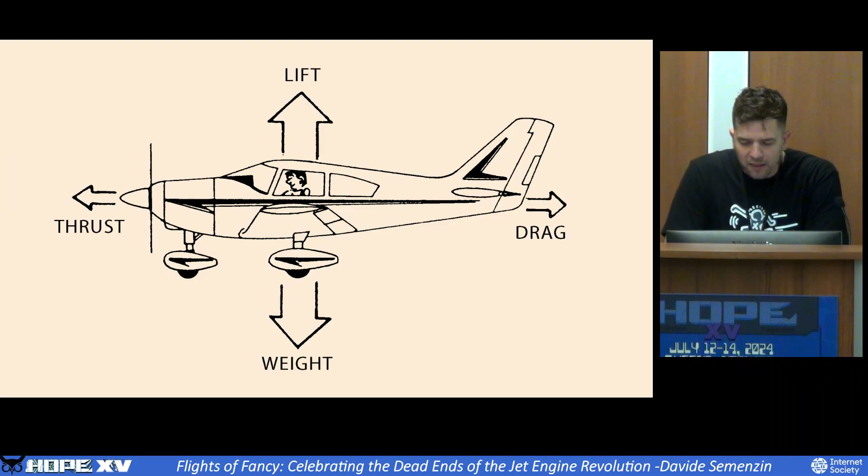If you're not familiar, these are simply lift generated by the wings opposed by the weight generated by the planet, and the thrust generated by the power plant that gets opposed by the thickness of the air. Or as the pilots in our midst will know, these are the real actual four forces of flight. Anyway, so here's the flyer. You've got the propellers back there that are pushing it forward, and the wings that are pulling it up. The whole structure is pulling it down, and the thickness of the air is pushing it back. So these forces are opposed pairwise.

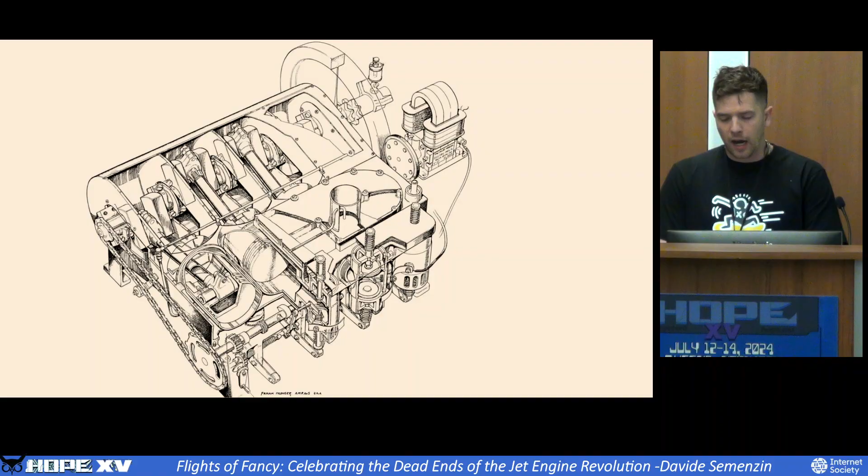So what's interesting about that is actually this guy right here. That's the engine back there, and that's a big propeller that's pushing the airplane, right? That's the power plant. That's how the first airplane was propelled. It was something that looked like this, and at this point in history, this is a very, very well understood entity, the reciprocating piston engine. And what this really did is it attached with a chain to the propellers, spun the propellers, moved the air forward and pushed the airplane forward.

Something I actually want to clear up here that's sometimes a misunderstanding is that technically all airfoils, all things that move in a fluid by thrusting it backwards, are technically jet engines, right? Technically, every airplane and every boat moves by propelling the fluid that they're in backwards and reacting to it. So what really makes a jet engine is not the fact that it's just exhausting air at high velocity.

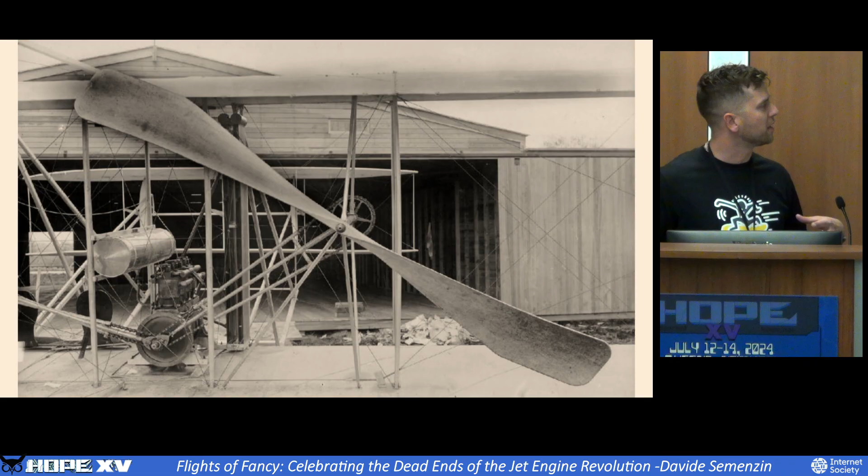What makes a jet engine is that it exploits a different set of phenomena. In a reciprocating piston-propeller combination, the engine generates rotating motion to spin the propeller, whereas in a pure reaction engine, combustion more directly generates the propelling force. The simplest such scheme could be a balloon or rocket engine, where gases expand in a confined space, get exhausted at the back, pressure drops, velocity increases, and you react against it.

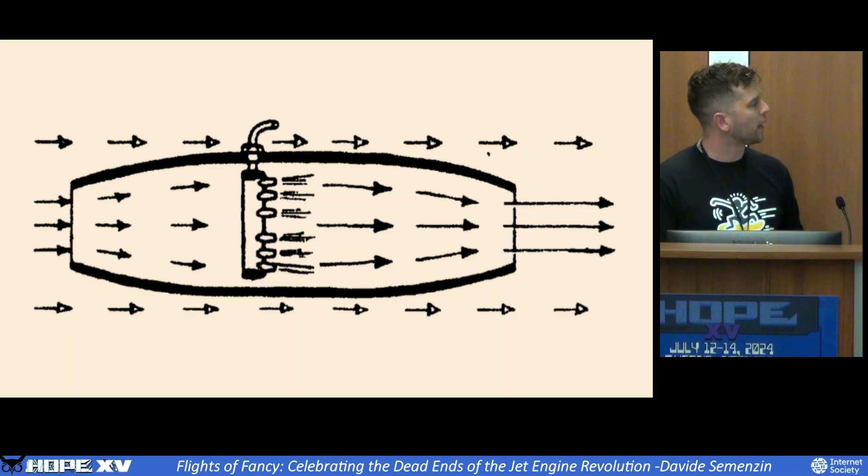There are largely two types of such jet engines. This is basically a rocket engine, and it's non-air breathing. Whereas the air-breathing version takes air from the surrounding environment instead of carrying it itself, ignites it, uses combustion to expand the gases, increase the velocity, and react against whatever it's attached to.

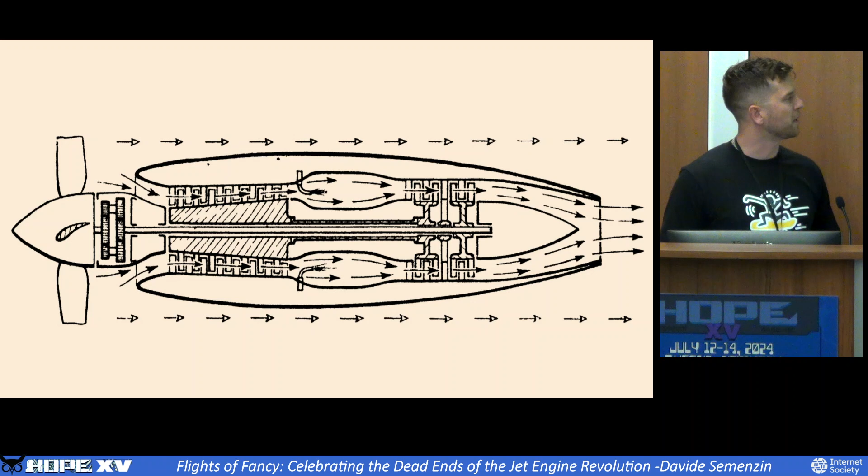There is a third type, the turboprop, which we're going to talk about later. This is kind of a mix of the two, where you use part of the energy generated by the reaction engine to spin a shaft. But really, when I talk about jet engines, this is what I'm talking about. You've all seen this. The basic idea of a modern engine is you have a compressor that takes the air, squeezes it, combusts it, and uses the high velocity exhaust to spin the turbine, which spins the compressor. The remaining energy is exhausted through a converging-diverging nozzle, creating a high velocity flow that you react against.

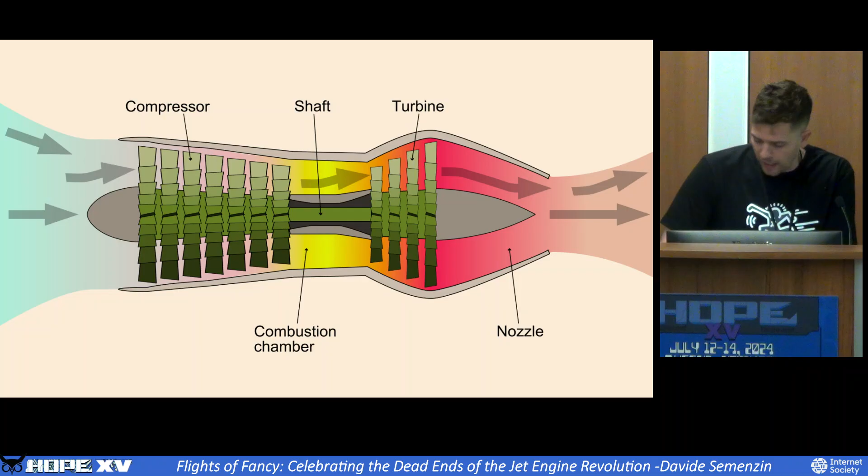If this does not seem like an obvious idea to you, it shouldn't, because it isn't, and it took quite a bit to get here. We see these things around all the time and we're used to them, so to us this seems obvious because we have the burden of knowledge.

So I think the question for us here is, how did this come about? If you go and look at the Wikipedia page for the history of the jet engine, and try to find out what this really looked like when it came about - what were things like in the early 1900s, where you had these very strange contraptions the Wrights were creating - how did we go from there to the modern airliners we saw? You're going to get a story that goes something like this, and it doesn't matter if it's Wikipedia or some documentary - I watched all of them.

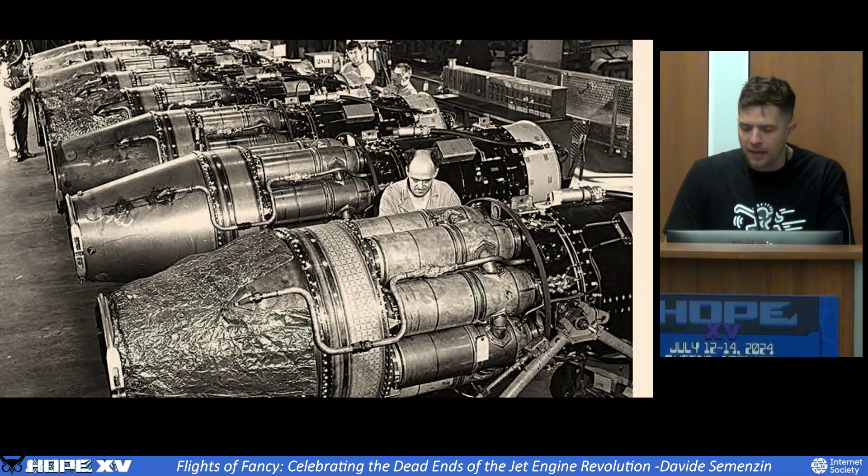If you heard the story before, you might be like me, and find that this invites more questions than it really answers. It's not all there. There have to have been so many other things happening before we actually landed where we are today. Like, what was wrong with piston engines? Why couldn't it make the plane faster? Where did the idea of a reaction engine come about? Who had it? Why did it take 30, 40, 50 years for it to mature? Why did it mature when it did? I want to try and answer some of these questions today.

I want to try and do the impossible. We have the burden of knowledge - we know the systems work, we know they're wildly successful, and we know the modern airplane uses a jet to propel itself. But let's pretend that we don't. Let's go back to the early 1900s and try to invent the jet engine. So our task is this.

We have an airplane, and we just want to go higher and faster. How do we do it? Well, we have a couple of options.

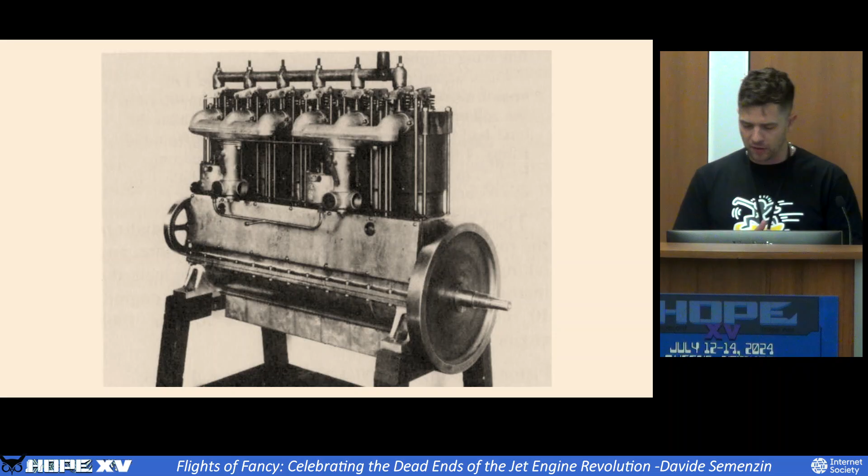So we can try and improve on this. I'm probably stating the obvious here, so sorry pilots, but that engine works like this: good old suck, squeeze, bang, blow, or for the more educated amongst us, intake, compression, power stroke, and exhaust.

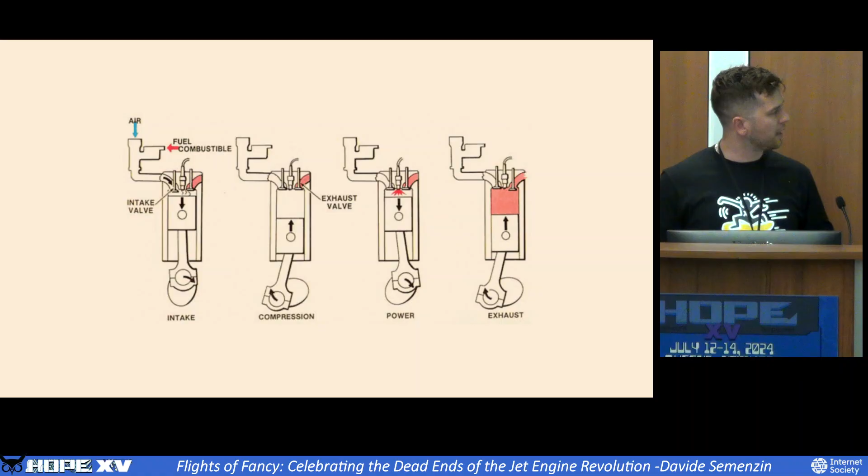The idea is you take some air, you squeeze it, you add some fuel to it, and combust it, increasing the pressure which pushes down the piston. You do this in a coordinated fashion across cylinders, each at a different point in its cycle, organized so they're all pushing down on the crankshaft. If all of this goes well, it creates a rotating motion—you attach a propeller to it, and you're good to go.

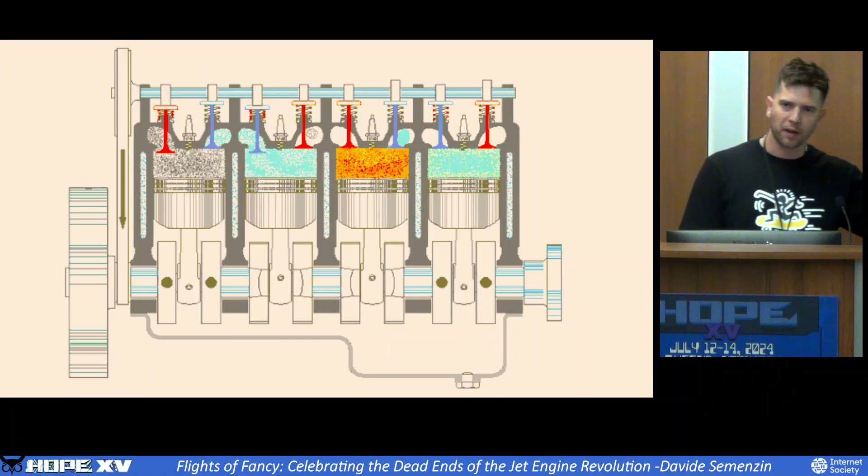So how can we make this better? Well, obviously we can add more cylinders—a lot more cylinders. Each one contributes to the downstroke a little more, and we get more power. More power means we go faster, and that's great.

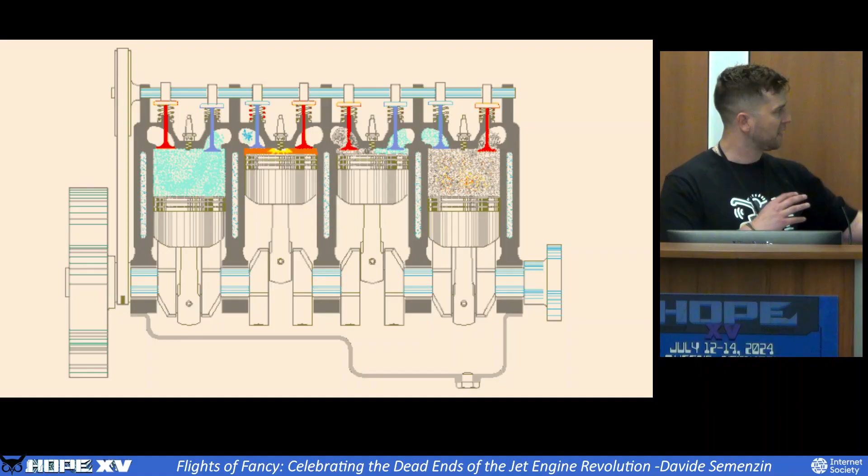One problem is that this engine works by a combination of a lot of little explosions, and each explosion is responsible for turning the crankshaft by a certain amount. The more cylinders you add, the smaller that amount is, and the more complicated the system becomes. More importantly, there's only 360 degrees in the turn, so you have an upper limit to how many cylinders you can have.

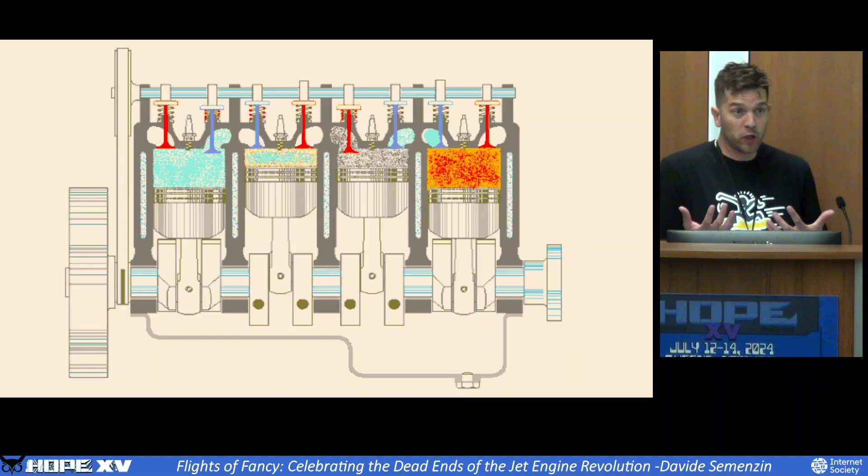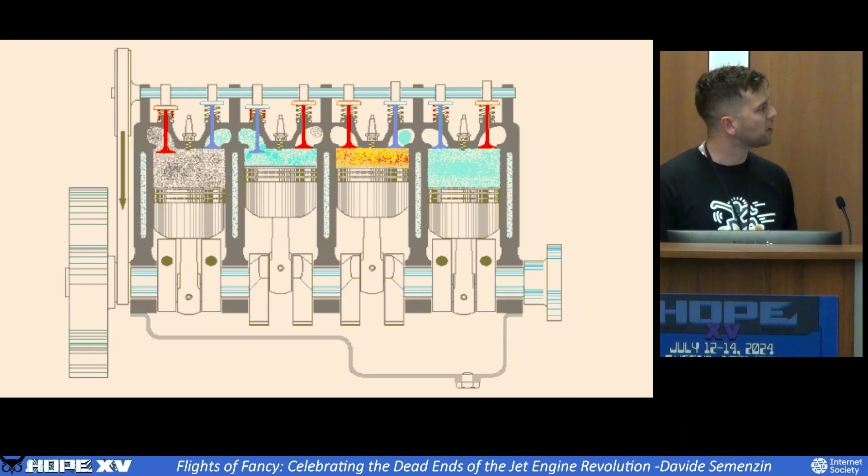We could make the cylinders bigger—for each cylinder that's bigger, you just get more oomph. But you can only do that to an extent before it gets harder to cool. You can make the cylinders longer, but that increases inertial loads on the rotating parts and ultimately reduces your power density. So you can make these things bigger, but only up to a point.

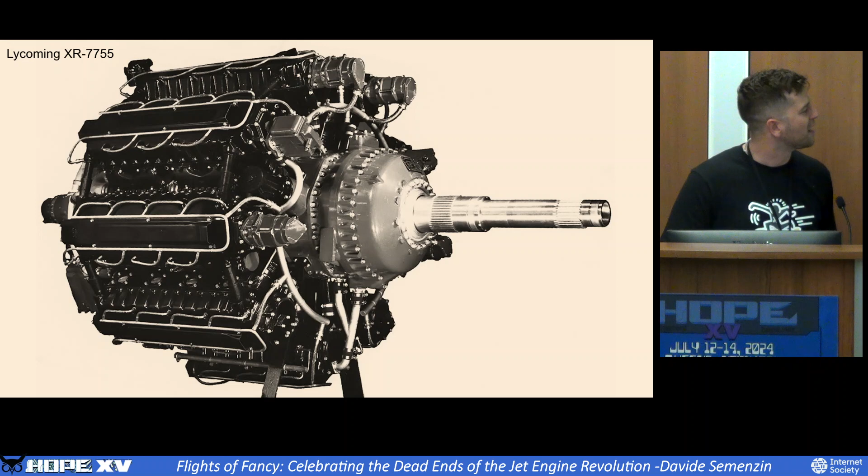And then there's another problem. Well, see, this is what happens when you have like 36 cylinders—this is the largest engine in terms of cylinder count ever made.

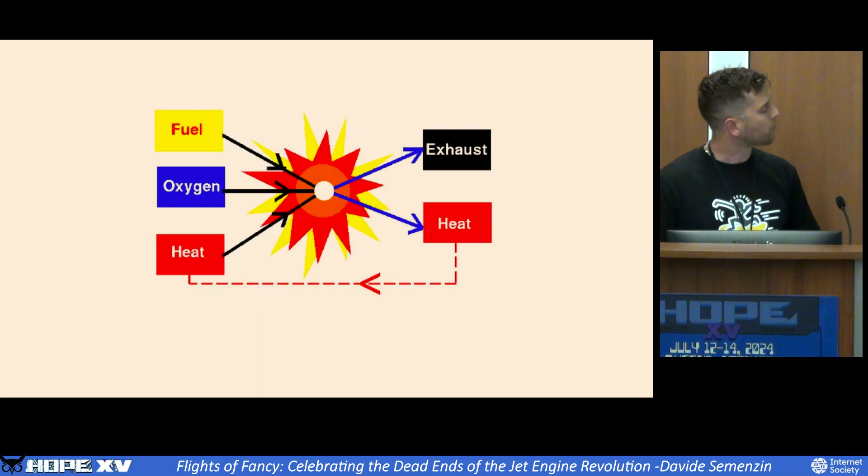The other problem is that airplanes have this pesky tendency to go up in the air. And what happens when you go up in the air? The density drops—there's less air to go around. So if your main mechanism to generate energy is combustion, you have less stuff to use to combust. This actually was a huge problem in the early 1900s, and this is the first thing we really need to solve.

It was solved by the use of a compressor—this is called the supercharger scheme. It simply uses some of the power from the crankshaft, which would otherwise go directly to the propeller, to compress the air before it enters the cylinders. This makes the combustion more efficient and lets the plane fly higher. Isn't that nice? There's only a problem with this.

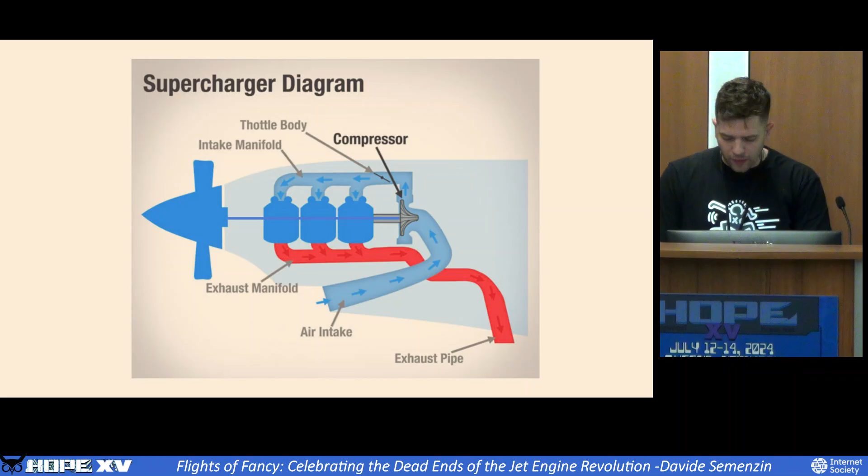Well, there's a couple of problems with this. The main problem is that it obviously takes energy off of the main combustion, off of the main rotating shaft. So this guy right here—he'll come back later—he actually had a pretty good idea.

Around 1920, he was tasked to solve a problem, and he invented this. This is called a turbocharger, and this is maybe the first really significant step towards the jet engine. The idea here is that you take the exhaust gas from your engine and stick it through a duct, and then use that hot and fast gas coming out of the cylinders, like a bat out of hell, to spin the turbine that then compresses the air.

This is better because it doesn't absorb any energy from the shaft, and in fact, it's just using the...

These engines are extremely inefficient, right? They convert about 20 to 30% of the power into motion, and the remaining into noise and heat. So you capture some of that with the system. That's great, it lets us go really high up, and keeps our fuel consumption the same. So our specific power has just gone up.

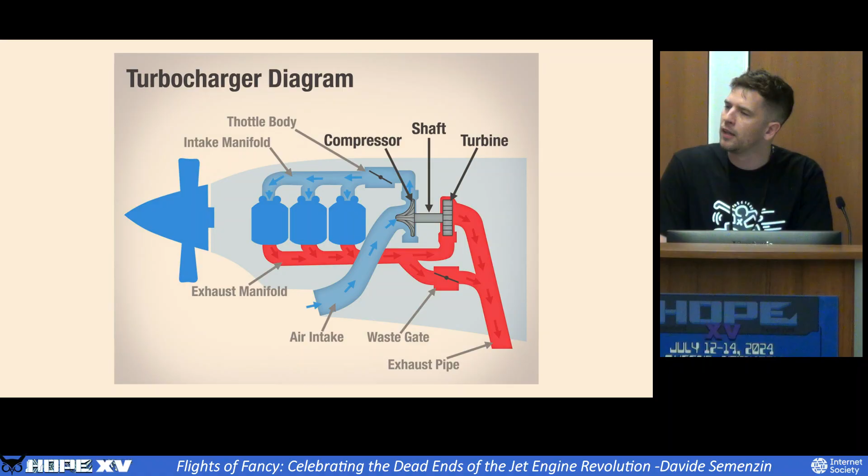One thing people figured out when doing this was that the amount of exhaust coming out of there was actually really significant. And when it was exhausting from that pipe, it still had energy. So the next thing we can ask ourselves is, how can we use that? What schemes exist to make use of that excess energy? We're already paying for it, we've already burnt it, so how can we put it to some use?

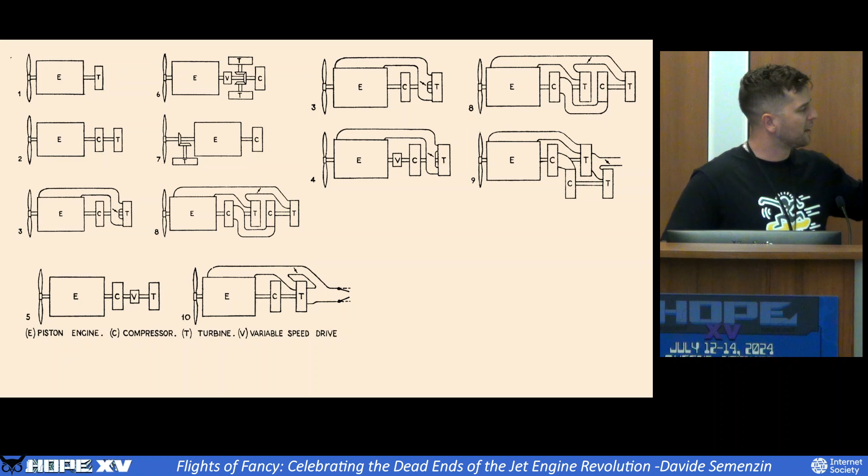There are a lot of these schemes, and not all of them were implemented, but the idea behind this, called a turbo compounding engine, is to use some of that energy to actually drive, in the first iterations, the crankshaft. This is the first engine in which this was used, the Rolls-Royce Crecy. It had a little turbine, actually like a Whittle-type turbine, which we'll talk about later. Even though it never really flew, it used the entirety of the exhaust to drive this turbine that then added that power to the crankshaft, again increasing the specific power.

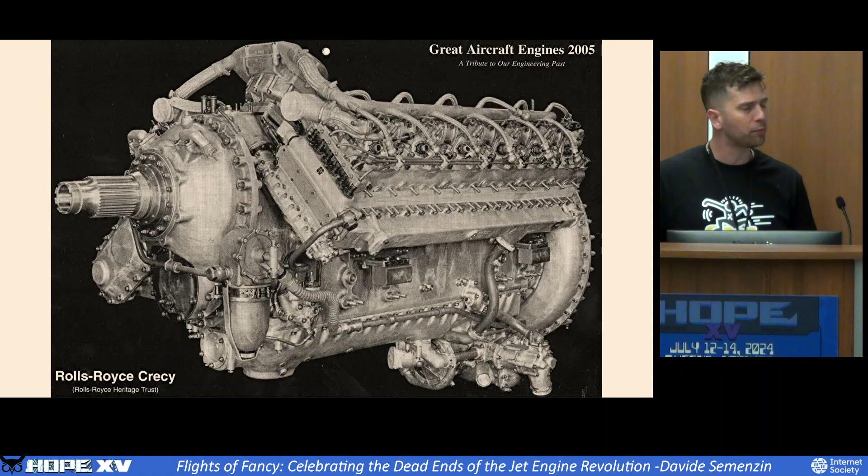What's interesting about this idea is that even though it was sort of a dead end, it was interesting when we realized you can use that exhaust not just to drive the compression, but to actually drive additional power to the crankshaft, since there was enough power in it. Another engine that did this, worth mentioning because it used a different type of compressor, an axial type compressor, was the Allison V1710. This also never flew.

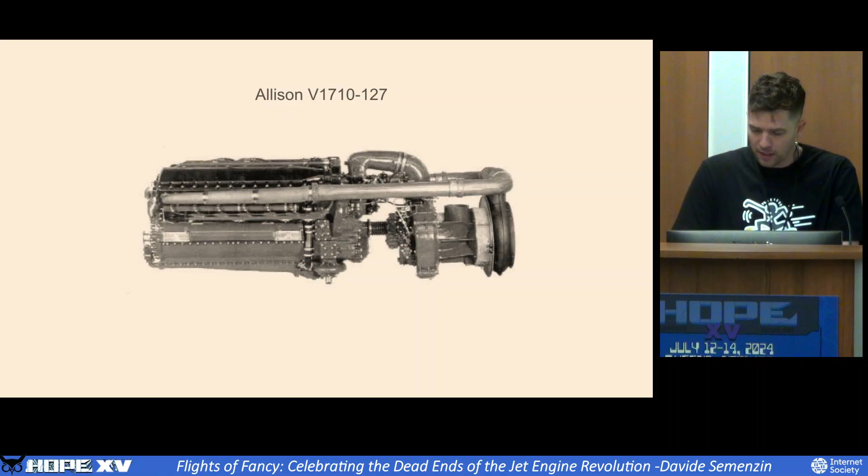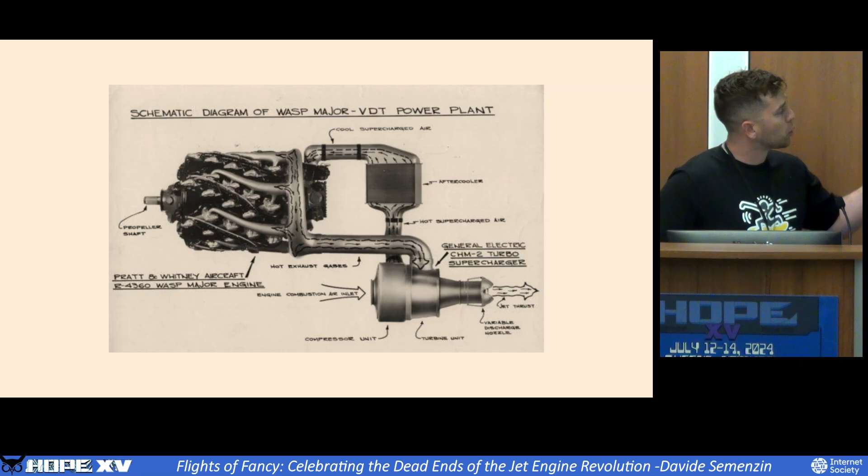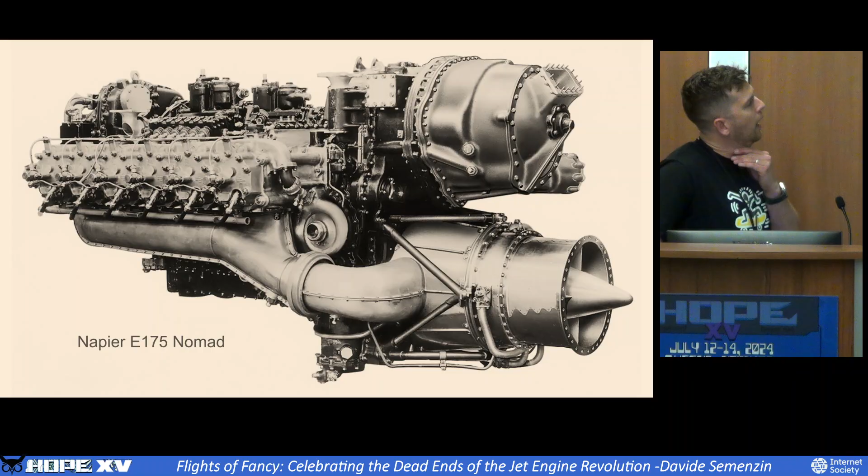The next thing after this was realizing that the flow coming out of that turbine still has energy. So instead of driving that flow towards the crankshaft, what if we use that flow just to accelerate the airplane forward? It's a little bit of a reaction engine in there. The WASP had such a scheme, but really the goat for this was the Napier E175 Nomad, and this guy had it all.

There's a lot going on here. This is one of my favorite contraptions ever invented, a glorious dead end. It had a gigantic opposing piston engine, and the way this worked is the air would come in here, it would get compressed...

The compressor was spun by a turbine, we'll talk about that. Then the compressed air, which gets hot, was cooled so it was more dense, and then that would go into another compressor that would send it to the engine to burn and create the exhaust gases. Here's a new invention: there was a combustion chamber downstream of this engine to further accelerate those gases so they would go to the turbine, spin it, and keep this whole thing going. After this, this turbine wasn't just doing all the compressing, it was also spinning one of the two propellers in the front.

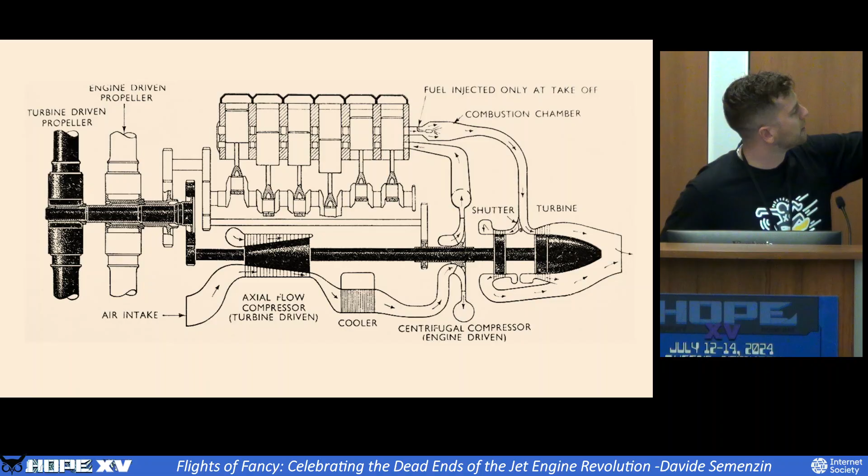So you squint here and you're like, have I seen this before? With some of the complication here with the double prop, it looks even more pure, right? You have an air intake, you have a lot of what looks like a jet engine, but it's just going through this gigantic, super complicated contraption. And this was never developed further—one of the greatest dead ends.

The reason it was a dead end is that people started realizing the amount of thrust you'd get through that little turbine was starting to compare favorably with the amount of power you were getting from the piston engine. So if you go this direction, we have some of the building blocks, but it looks like this is not going to do it—we're not going to get really far by keeping a piston engine in the loop.

So let's think about something else. Is there something that we can do that is not like evolving the piston engine, like with the crankshaft?

Well, if we roll back to the early 1900s, this is actually a pretty interesting thing. This guy, Lorin, he was a French soldier. He actually had a bunch of really good ideas.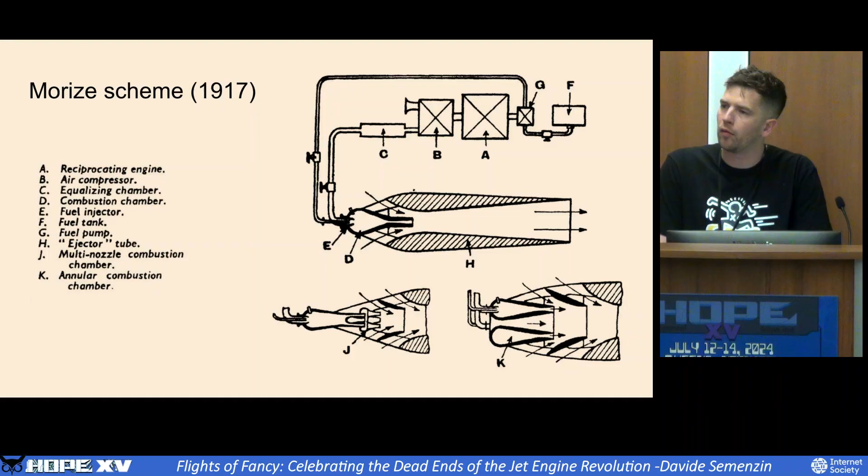It wasn't great. So another scheme that came up in the early 1900s was this. It still used A as a motor, and B as a compressor. It basically creates a steady flow of compressed air that goes into a combustion chamber marked D. The compressed air and fuel mix in there, gets ignited, and then goes through what's essentially a venturi that sucks in the air, multiplying the amount of air going through it, increasing the reaction.

There were a couple of iterations of this with different architectures for the igniters, but it was the same idea. One problem with this is that it used this converging, diverging kind of architecture that is not great.

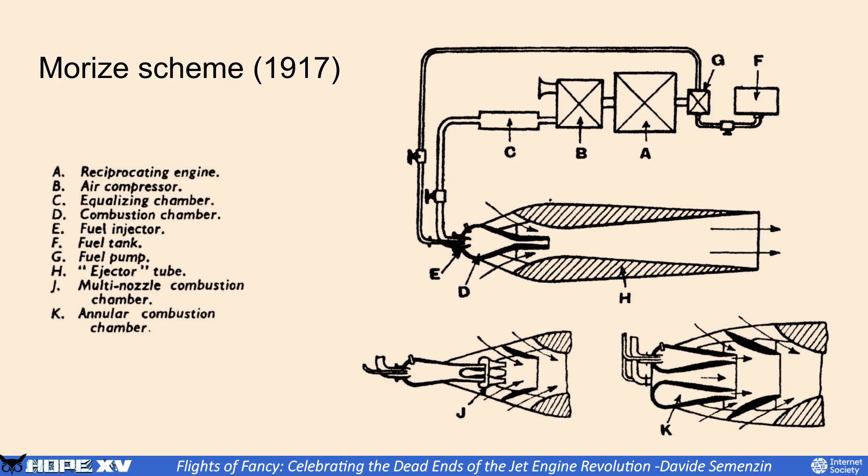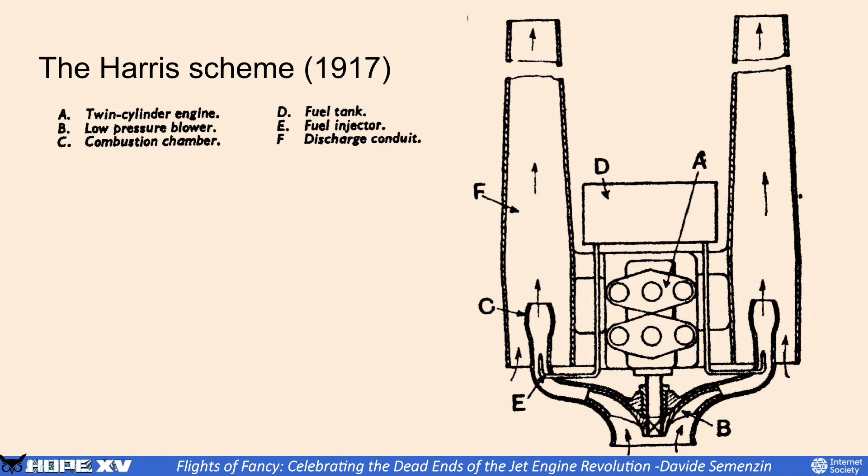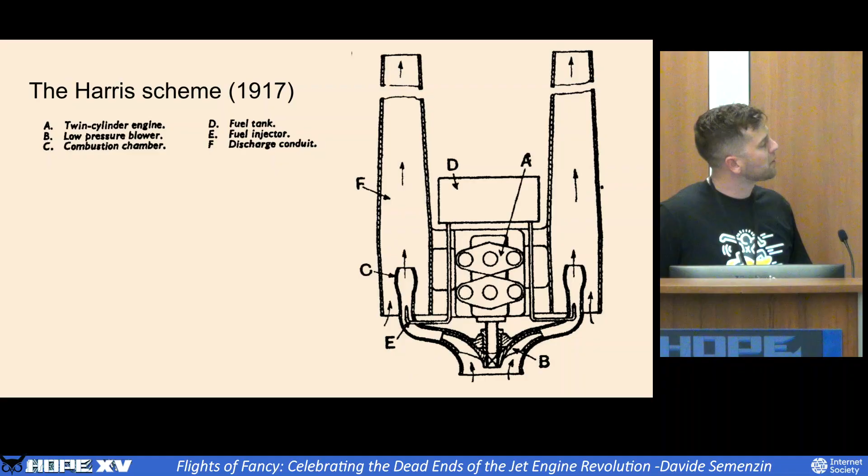So the next iteration did the opposite, using a diverging converging long tube to take in the gases. The idea here is at A, you have a motor spinning the compressor. At B, that's taking in the air in the injector E. At C, the air gets ignited, creates an area of low pressure, and this low pressure flow accelerates along the tube and sucks in more air. The tube is really long so that by the time the gas gets out, it's at the same temperature as the outside air, so it doesn't allow for backflow.

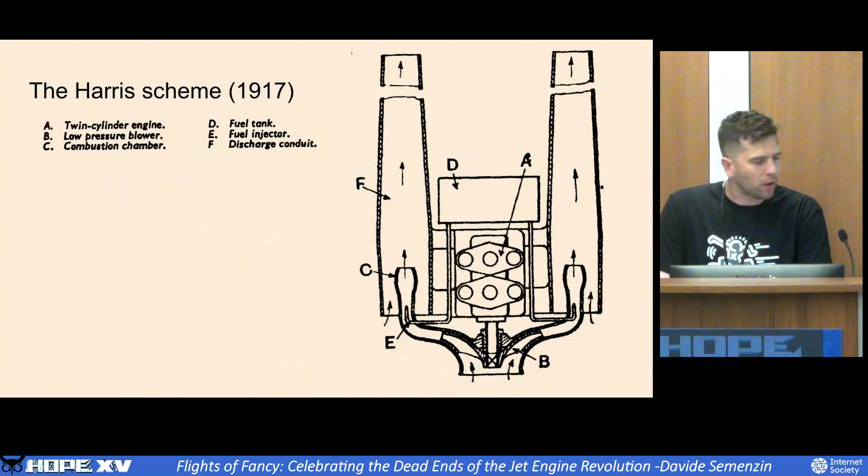This never worked. But the general idea here was to try and accelerate gases by exploiting a combination of combustion and low pressure, right?

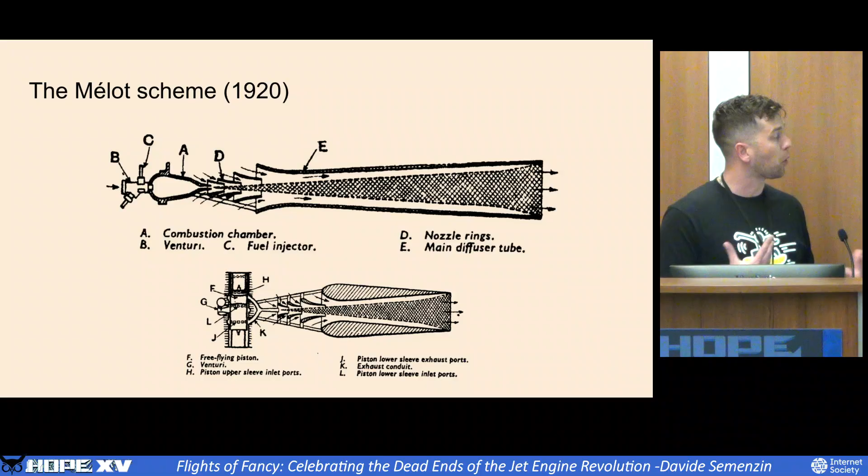This is another similar scheme, and this was actually tested in Langley in 1927. There were attempts to recreate these engines and implement them, and they never really delivered the kind of specific power that could have been used for aircraft propulsion.

So here's a different idea, different but similar, but we're starting to go somewhere. Instead of using an engine that is separate, why don't we put the engine inside the engine, inside our prime mover? So you have a rotating engine here that spins a compressor, and then in line, the airflow gets ignited and gets ejected.

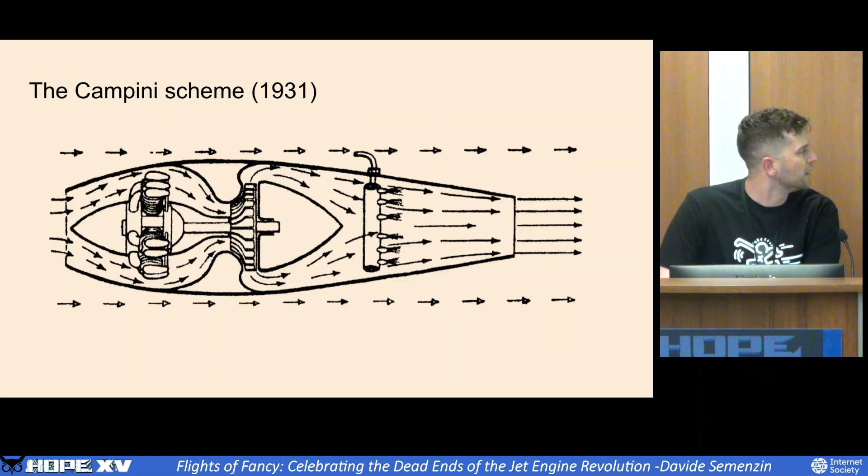This is starting to look a lot more like a jet engine. It's basically a jet engine where the compressor stage is powered by a piston engine. And this has a name. It's called the motor jet. The first motor jet was this Italian contraption called the Campini Caproni CC2.

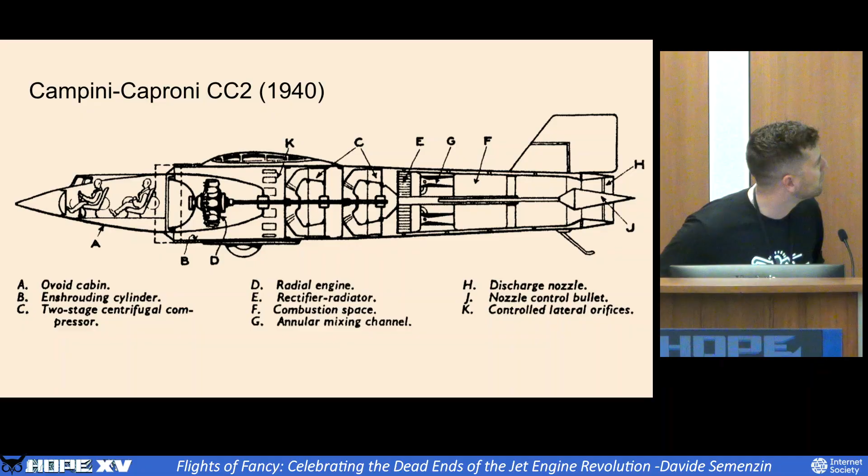It was incredibly inefficient and in its own way a dead end, but a glorious one at that, because it had two of the three components there, right? It had the compressor, it had the ignition... did it have the turbine? No, it didn't have the turbine, but the main compression happened through the piston engine.

So this wasn't the only one that existed. The Russians also had this idea. This plane sometimes gets depicted without the propeller. Depending on whether you want to use that engine to drive only the compressor that then creates the jet you eject at the back, or if you also want to use an air screw.

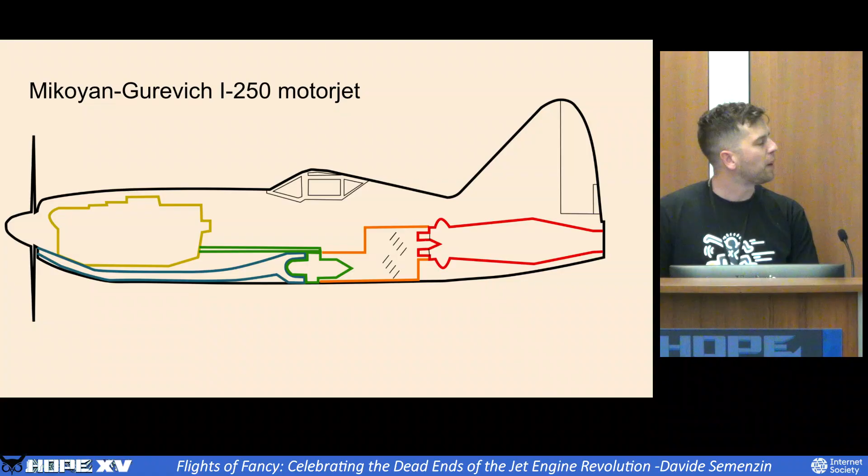Okay, so this is a dead end. This is not going anywhere. This was tried, and the specific power of this was not good. So let's go back to this. Here's another idea.

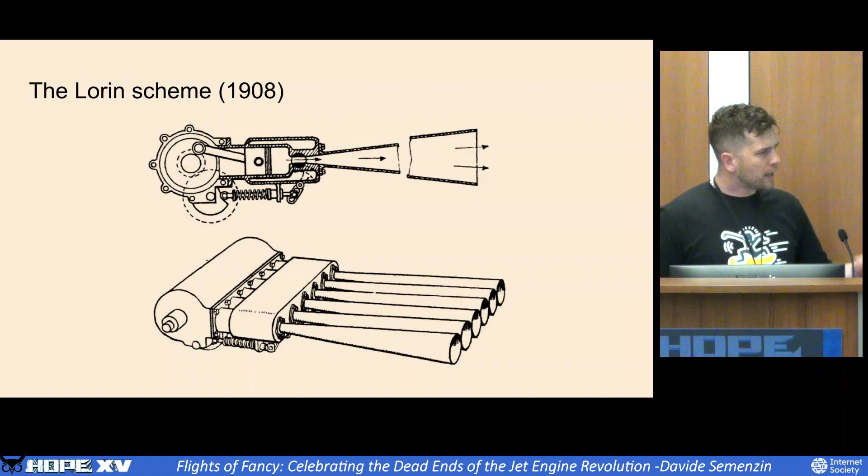Why don't, instead of trying to improve or use the piston engine, why don't we try and imitate it? We just take this idea of little explosions, right? That's called a pulse jet.

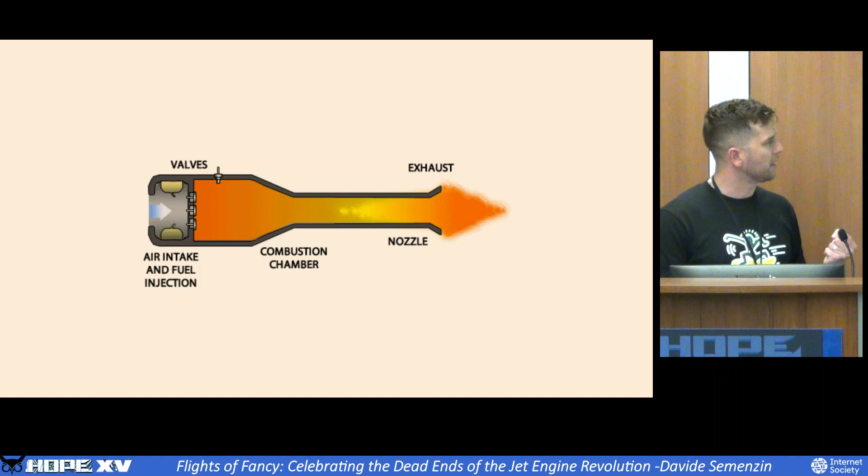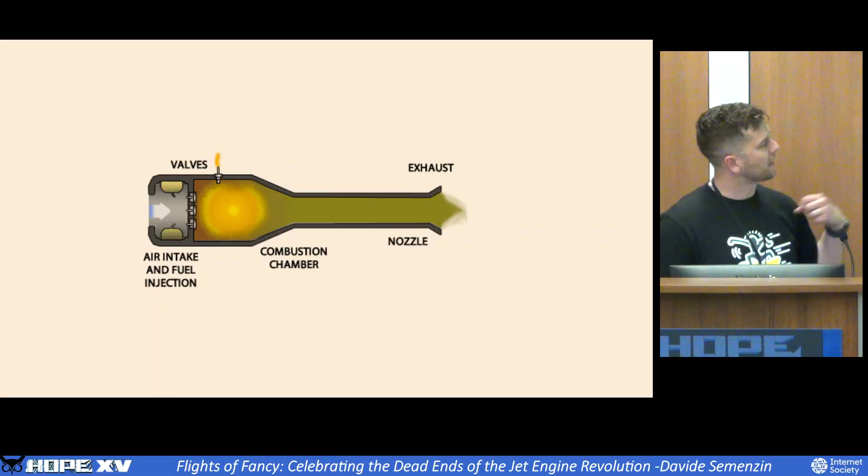The idea is this is a very simple type of engine where air comes in and you have some kind of flange that creates a sealed area. You then ignite it, let the gases exhaust through the back. That creates a vacuum that opens the intake, and the cycle begins again, right?

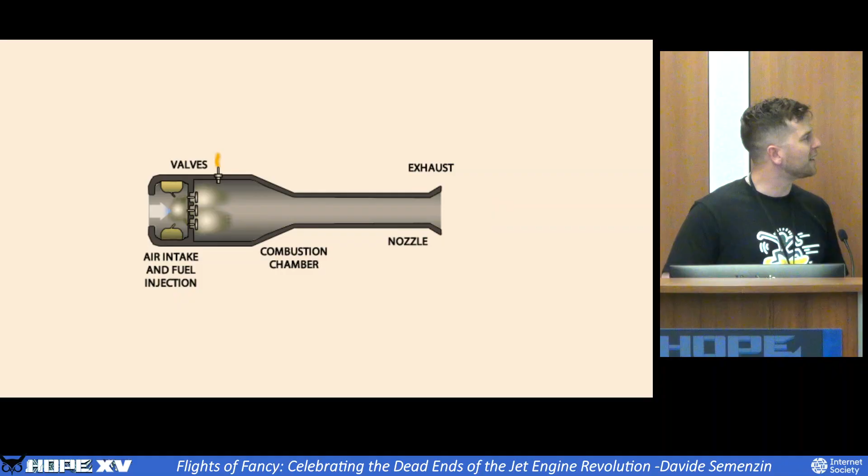However, no real pulse jet airplane ever came to production, because this was also extremely inefficient. And so we come to this guy.

So we're done, no jet engine for us. This guy said it's impossible, so we should all go home. This is an important lesson to bear in mind - we're going to circle back to that later.

Somebody didn't agree with that - Frank Whittle had a few things to say. But before we get there, let's just think about what we did. We tried to improve the piston engine by making more engine, making it bigger and faster. Didn't really go anywhere - it almost converted to a jet.

We tried to imitate it. We tried all of those weird schemes. None of that worked - they were very inefficient. So let's try a whole new thing, right?

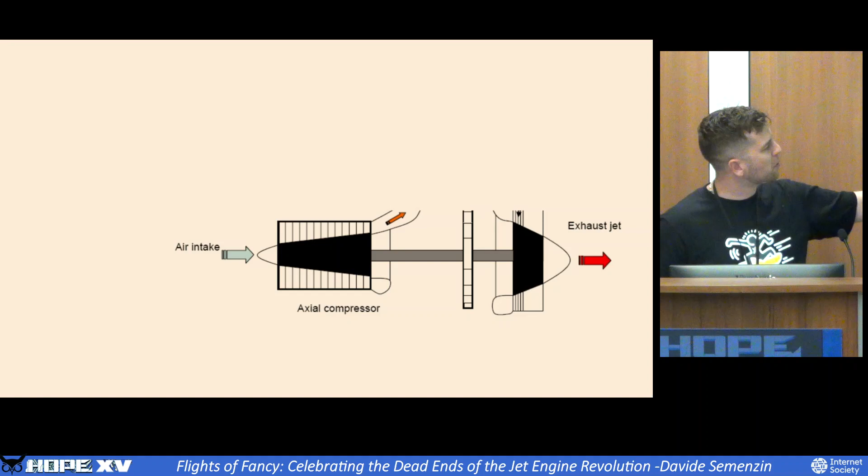Let's go back to this guy and focus on - remember it looked like this. Let's focus on the bottom half. Remember we were saying this thing really looks like a jet? It's just going through this whole big clunky thing. Let's try and get rid of that.

It's starting to look a lot like this. And there are three big ideas that we need here: suck and squeeze, bang, and then blow.

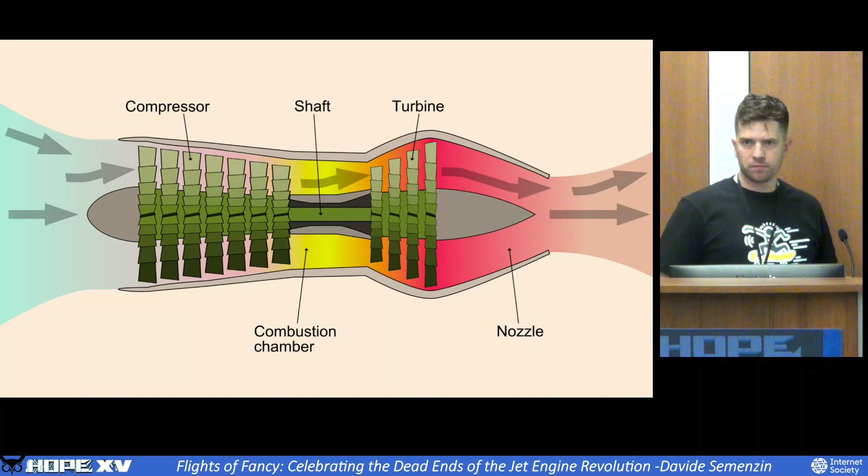The compressor is something that, by the early 1920s, was very well understood. Combustion was also decently understood, even though, for example, pulse jets never came to fruition because of combustion instability. The turbine, however, that's a more interesting story.

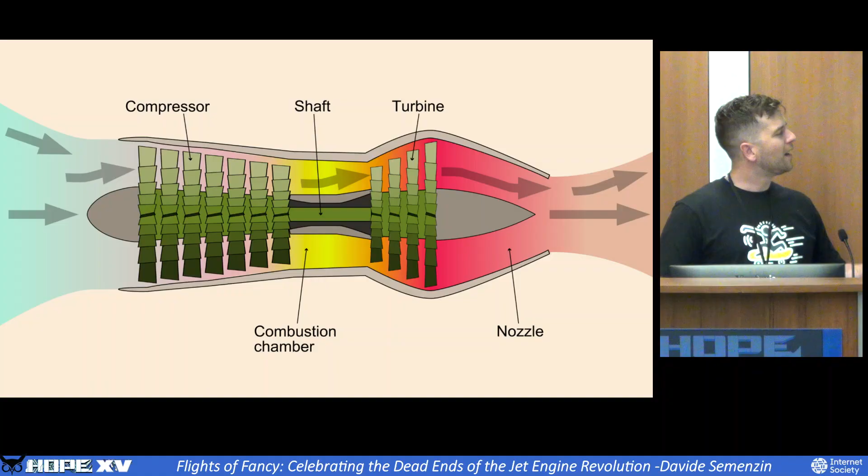Rateau, right here, we talked about him earlier when he invented the supercharger, the turbo supercharger. He also did a lot of work not only in the realm of compressors, but also in the realm of turbines. So if you know anything about turbines, you certainly know what this is, right?

But by the turn of the century, really the main way to generate power was the steam turbine. This was also a pretty well understood system, and it achieved pretty significant degrees of efficiency.

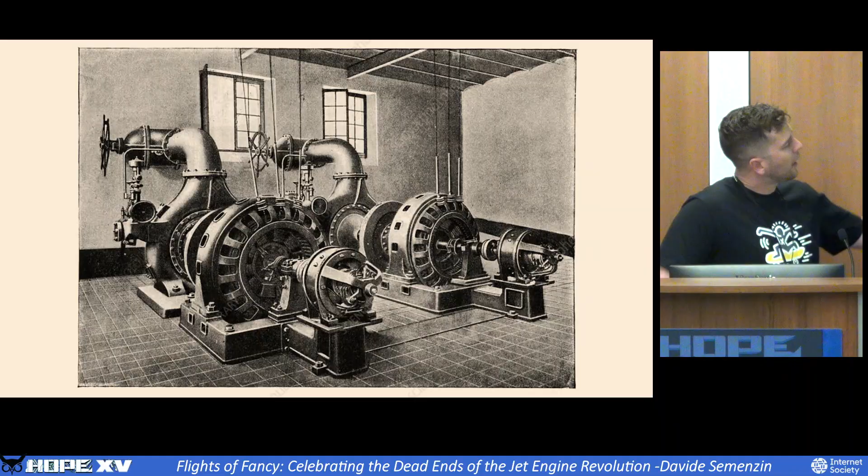However, this was kind of a new thing - this is like after you power your turbine with steam, what can you power it with? The big idea is you power it with gas, you power it with combustion, right?

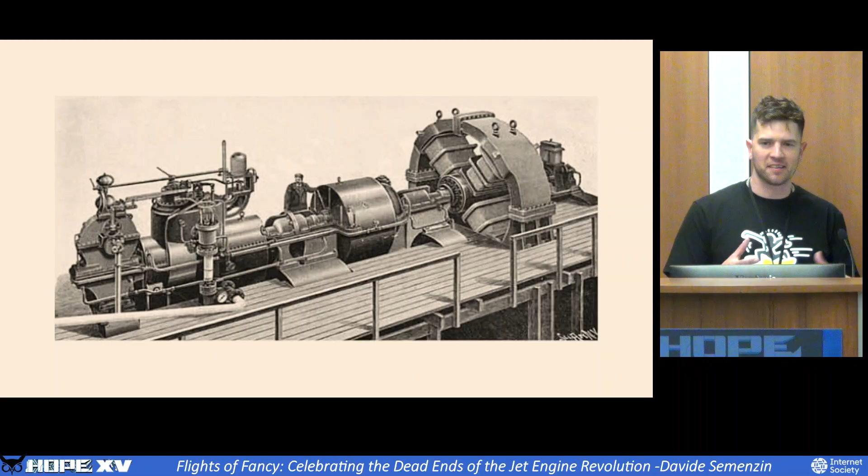It's kind of like a jet engine, but you don't use the jet to move stuff forward - you use that to spin a generator to generate electricity. The first one to ever come online actually came online in 1906, and it was built by this guy.

The problem is this was a huge thing - you definitely cannot put this on a plane. It's pretty heavy, and it barely generated enough electricity, enough power, to sustain itself.

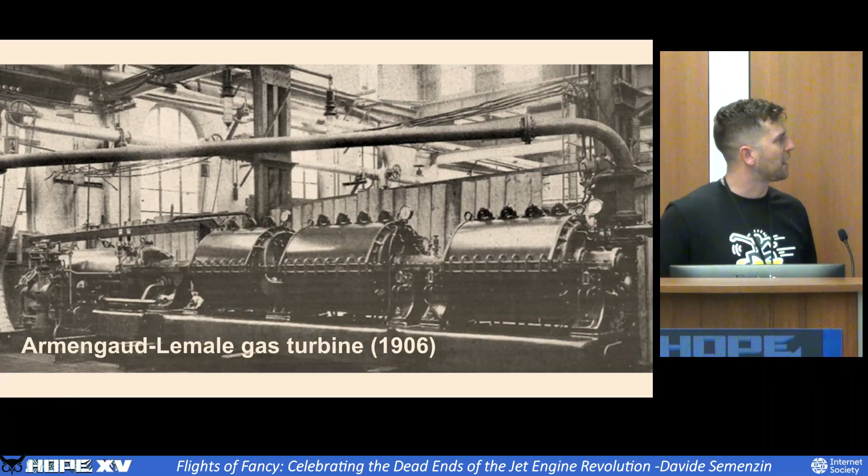And why is this relevant to the history of the jet engine? Well, it's relevant because somebody in 1921, Guillaume Maxime, had the idea of compressing air with a compressor and then using a turbine to extract that power. But this was never built because the materials weren't available.

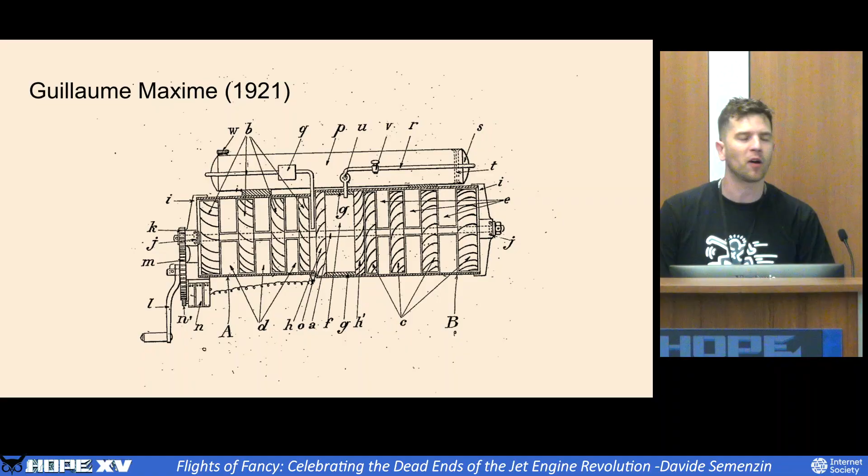But more importantly, successive attempts to build it never worked, and they led to that report that said this is impossible. The reason is that all of those turbines were flying stalled.

And the problem is we didn't have an aerodynamic model of the turbine until the mid to late 1920s, by this guy, Arnold Griffith, who wrote an aerodynamic theory of turbine design. This is the seminal, pivotal point that allowed Frank Whittle to invent the jet engine. And, okay, I should caveat that.

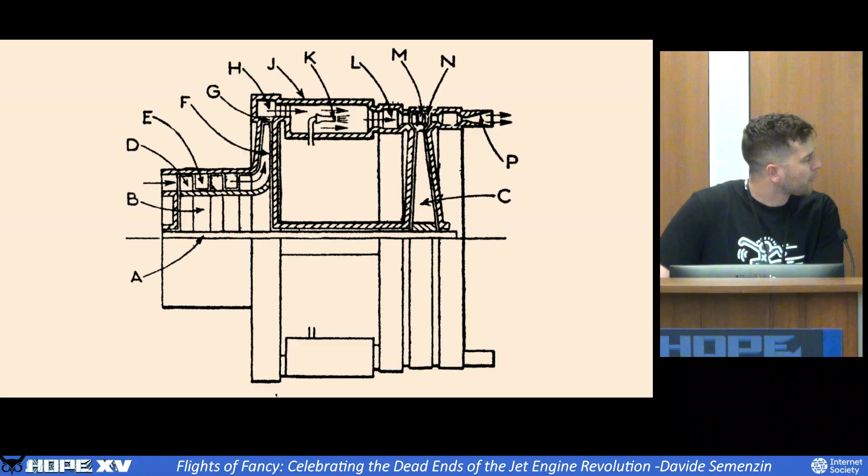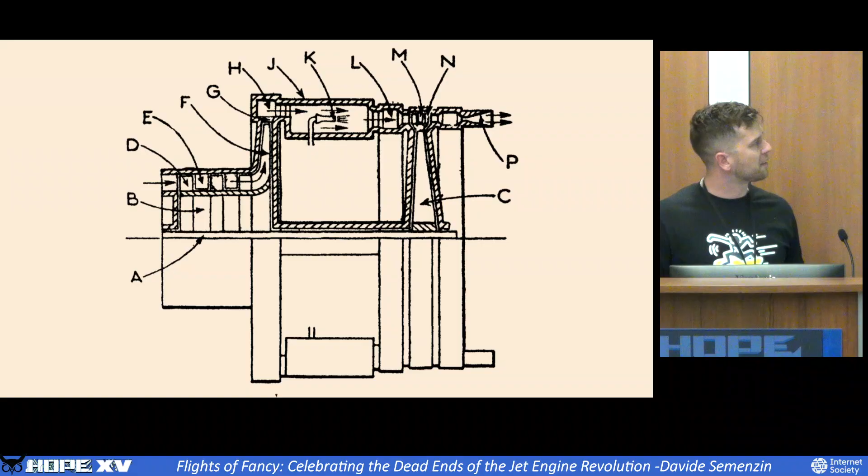So this is Frank Whittle. He is the guy who we usually, especially on this side of World War II, credit for inventing the jet engine. The first design, this was actually never built, looked like this, but his first jet engine wasn't something that could readily be put on the plane.

The second one looked more acceptable and compact. It worked by sucking in the air from the sides here. This was a double impeller design, a centrifugal double impeller, sending that compressed air into the combustion cans and then exhausting it through the back.

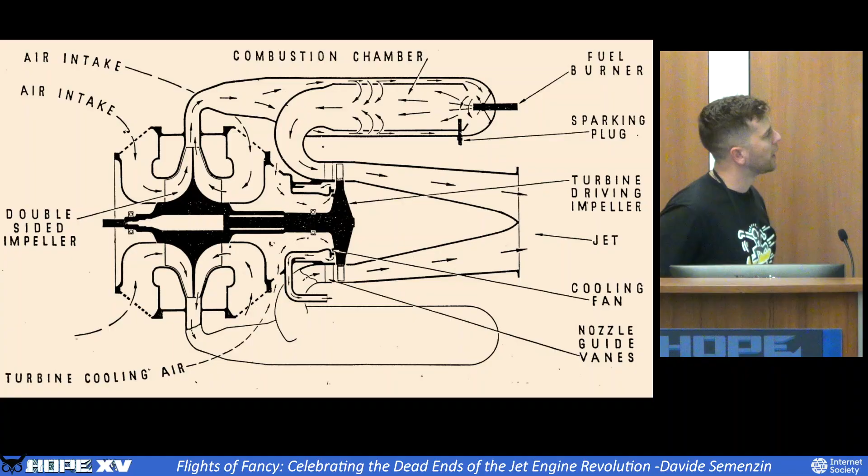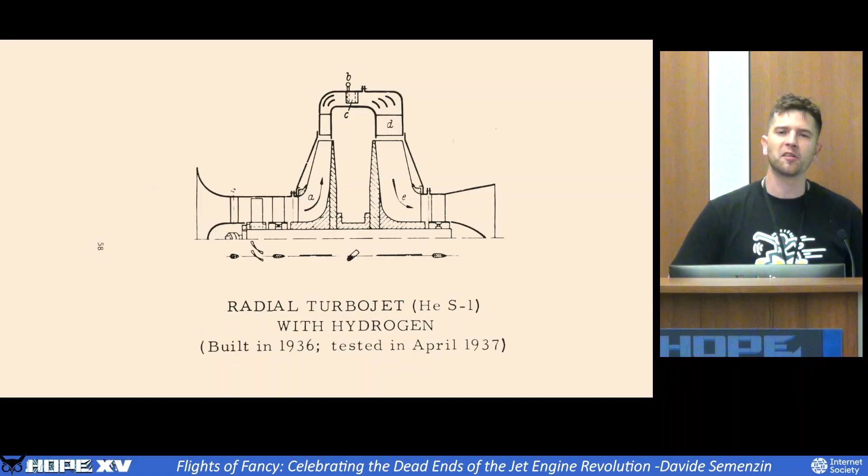At this point, this should be pretty well understood. And obviously there were two sides to the war - there was also the evil guy, and we all know wars are good versus evil. Interestingly enough, Hans von Ohain's first jet engine actually didn't run on petrol or diesel, but on what's called hydrogen, which was an interesting choice. Hydrogen is a pretty difficult propellant to work with, and that was a dead end that didn't work out for him.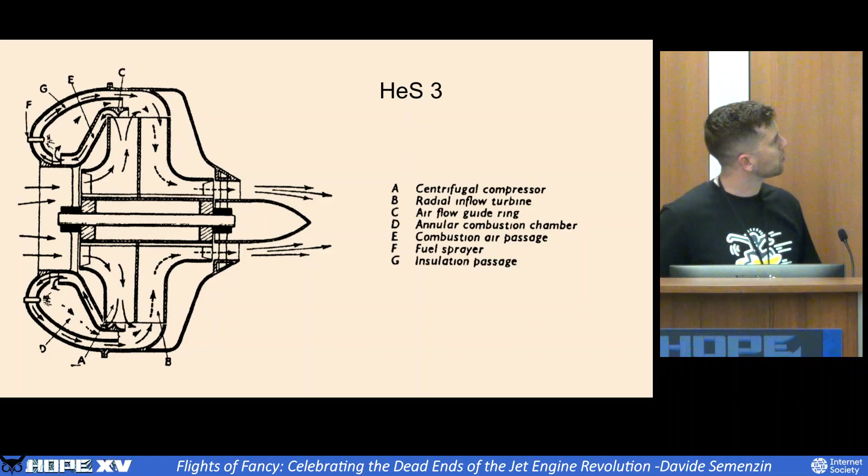But he iterated on this, and the first engine that actually made it on a plane was the Heinkel HeS 3. It looked a lot like Whittle's - they both had a centrifugal impeller and exhausted the air through the back, single stage combustion. Pretty simple thing, and it looks something like this, pretty cool.

The first time he flew was on the Heinkel 178 in 1939. That's important to remember - when World War II started, Germany already had a flying jet. However, this is not that scary.

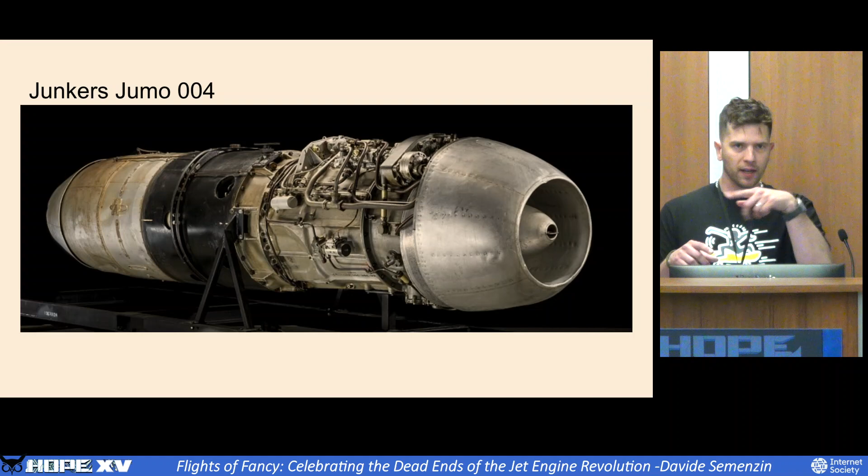What made the scary stuff was the successive evolution, the Jumo 004. You can see it's obvious this is a pretty different contraption - this is short and stubby, and this is long and slender. It's long and slender because it's using an actual compressor - instead of compressing the air by spinning it and accelerating it sideways, it accelerates it forward.

It was mounted on the Messerschmitt 262, a pretty mean looking airplane. And there's a little bit of a story about, if Germany had this thing, why didn't Germany win the war? Well, it's a little more complicated than that. I hope we all understand that.

But there are a couple of reasons why this didn't actually reach the level of production and reliability that could have made a difference for Germany. One of them - Hitler decided that the jet engines were meant for bombers instead of fighters, a weird choice. But more importantly, these engines were not nearly as reliable as the British equivalent.

Why? Because Germany, due to the wartime economy, did not have access to the materials really important to make the blades inside of the turbine. Why? Because the combustion generates gases at like 600, 700, 800 Celsius, and there was a time, especially up to the 20s and 30s, when it wasn't even thought that materials could exist that could withstand these temperatures.

But never mind that, we did it - we invented the jet engine. We went through a couple of dead ends, attached some very weird contraptions to some combustion engines, some piston engines. But we were there. We did it.

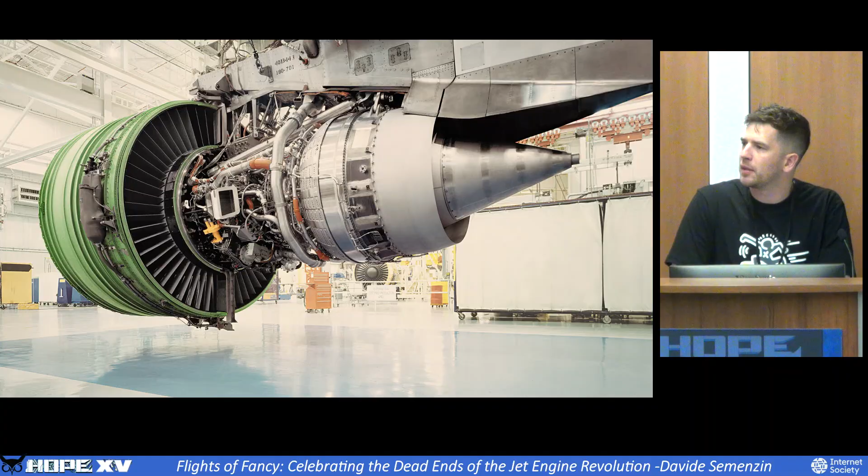Whereas today, most of the planes you fly on are turbofans, and the difference is bypass. The thing is, the turbojet in itself was almost a dead end, in the sense that the fuel efficiency of a turbojet only really makes sense for the military and for the Concorde.

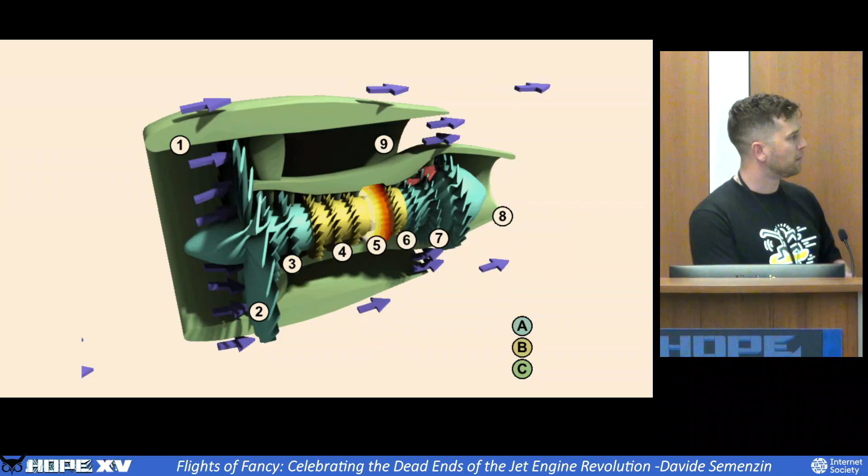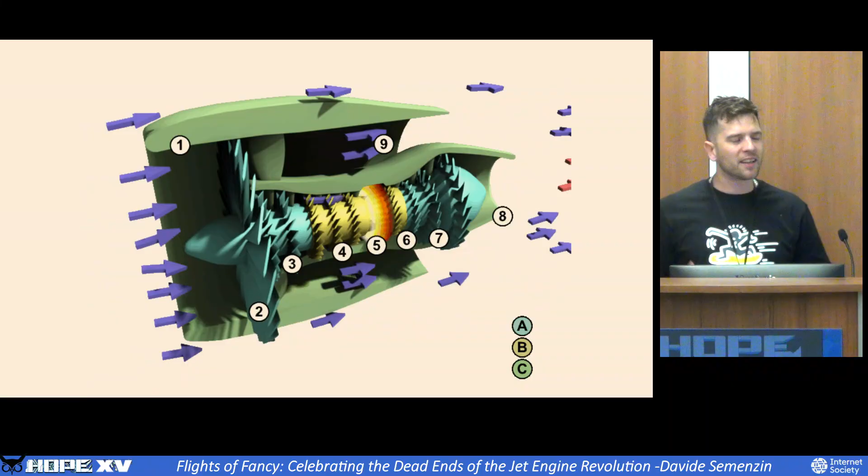But for real life commercial applications, what you want is something like this. The idea of a high bypass turbofan is that the center core is your jet engine, but what it's really doing is spinning a propeller. We're back to square one, right? Back to the air screw. The only difference is the propeller is ducted, which gives it nice properties around limiting tip vortices and whatnot. We're recycling old ideas, and that's what's interesting here, these are ideas that come back and get re-implemented in different ways.

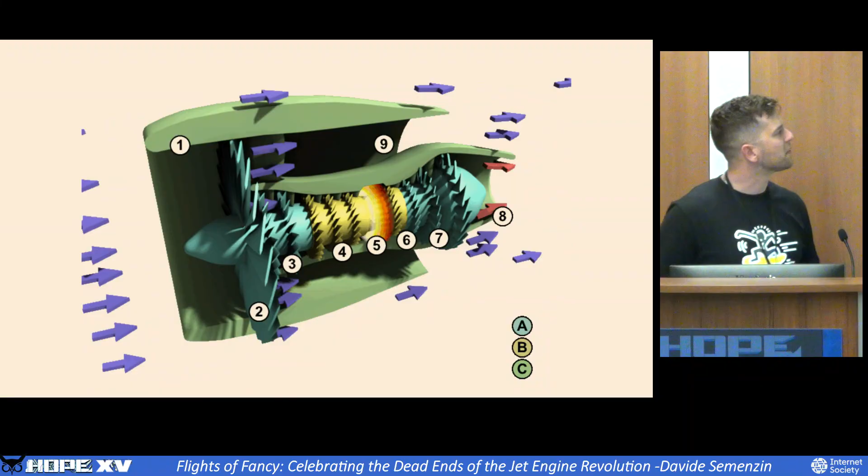This was a project that the U.S. Air Force, at the time SAC, started in the mid-50s. The idea was to build a high-altitude reconnaissance airplane. And if that sounds familiar, yes, please bear with me. This airplane was supposed to fly at Mach 2 or 3, really high up in the atmosphere where there isn't a lot of air, and it was supposed to fly on hydrogen.

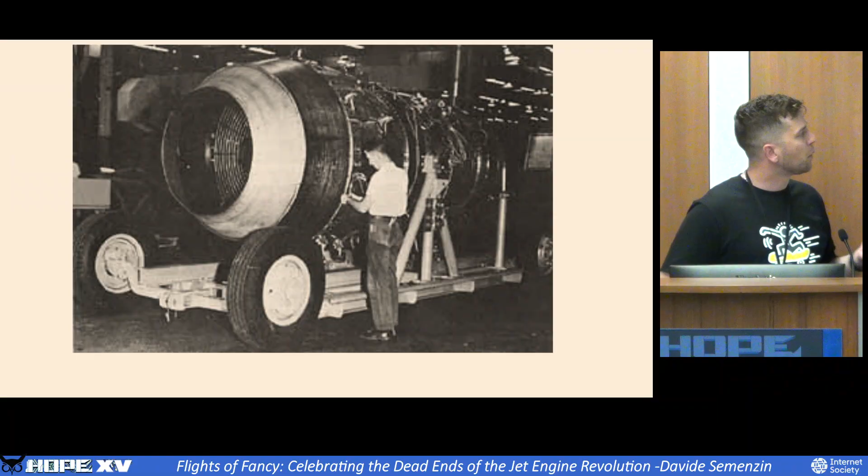So this was the engine. This was built and tested in West Palm Beach, Florida. But then this never came to be. Kelly Johnson realized that hydrogen propulsion was never going to work because of the low... hydrogen has high power density but low absolute density, and also it's cryogenic. It's a mess. So for the same reason it's hard on rockets, it was even harder on a plane.

And so Project Suntan was canceled, and I think Project Archangel took its place. Project Archangel, initial letter A, there were 12 iterations of these, and number 12 was this guy, the A-12, the father or brother of the SR-71. And so while the hydrogen-powered jet engine that was initially invented by von Ohain wasn't a working alternative then, and it wasn't a working alternative even in the 50s with the budget of the US military, not all was lost, because this particular dead end actually gave us something else that's great.

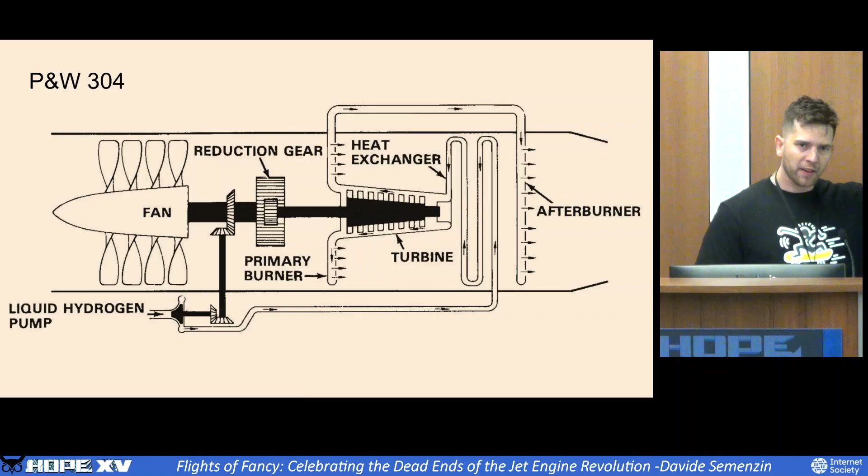See that little pump over there? That was developed by Pratt & Whitney, and it went on to become the foundational pump that powered the RL-10 engine, which to this day is the OG stage 2 engine, they're still launching this thing on a Centaur. So you have a dead end somewhere, and you get something good on the other side.

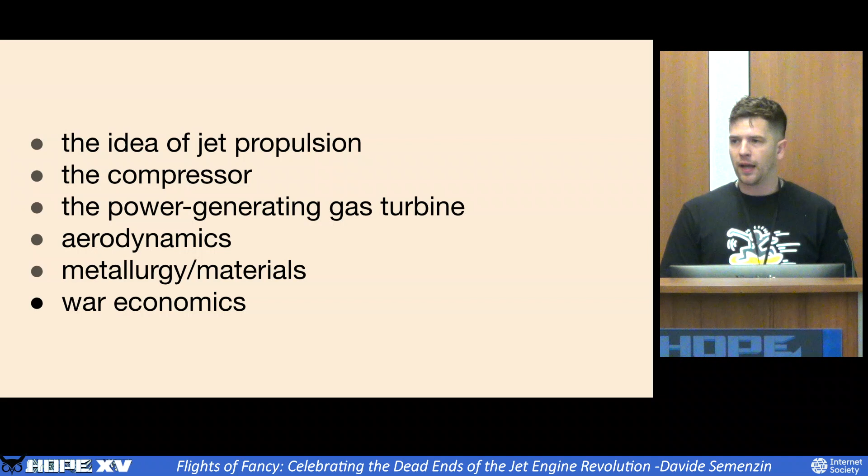All right, we've gone through a lot of stuff, and I just want to bring it back a little. A lot of things had to come together for the jet engine to become a reality: the idea of jet propulsion, a working compressor, the power generating gas turbine, the whole notion and construction of aerodynamic theory around it, the materials, the metallurgy, and even the war economics that drove the development of some of these technologies.

And the reason why this is important is that, to me at least, no one idea mattered. They all mattered at different points in time, they all mattered in different ways, but ideas alone weren't quite cutting it. The intuitions underpinning the jet engine were available decades before the jet engine came to fruition, and yet this didn't accelerate things one bit.

I decided to call this talk Flights of Fancy after I found this article from around 1943 or 44, titled 'Jet Propulsion from Fancy to Fact.' It had this blurb that talked about how it's regarded as one of the newfangled ideas, and people think it's very futuristic and it's not going to work.